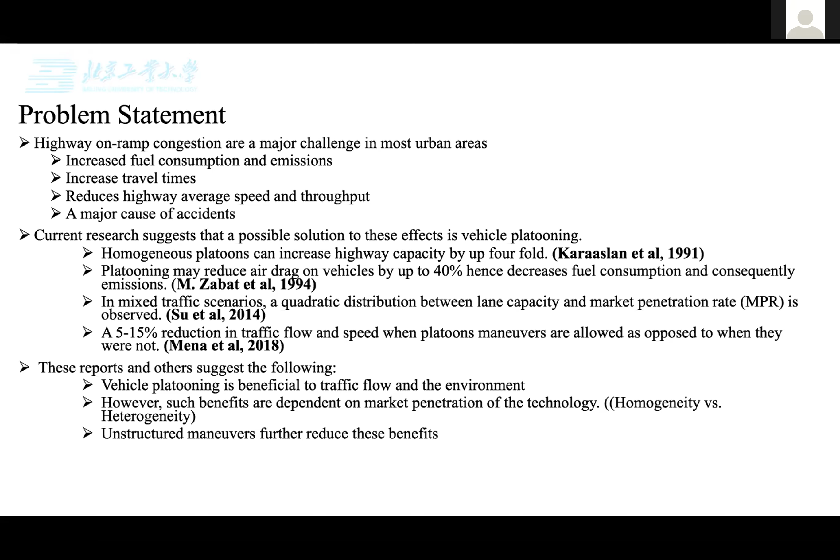Now, let's take a brief introduction to what platooning really is. Vehicle platooning is when two or more vehicles travel together at synchronized speeds by trying to maintain a constant gap between the vehicles. The advantages include improving traffic flow dynamics, travel speed and time, road and highway throughput. It also reduces the fuel consumption and emissions. It improves the safety because human error is taken out of the equation.

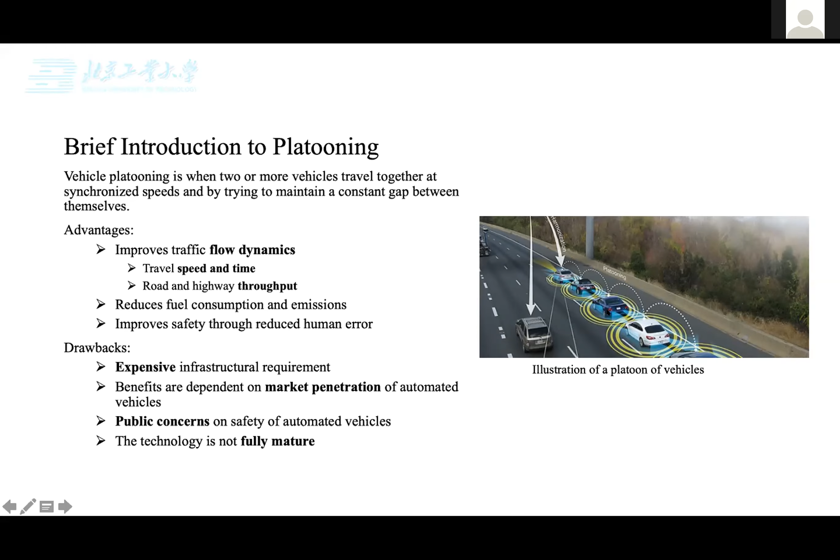Now, because it's not easy to achieve vehicle platooning in real life, you have to be part of a major project to actually execute a project like that on a large scale. We implement vehicle platooning on simulation software in order to observe the impact of such platooning applications on a network. The framework of choice we use is SUMO, which is an open source road traffic simulator. OMNeT++ is used for the simulation of communications between the vehicles.

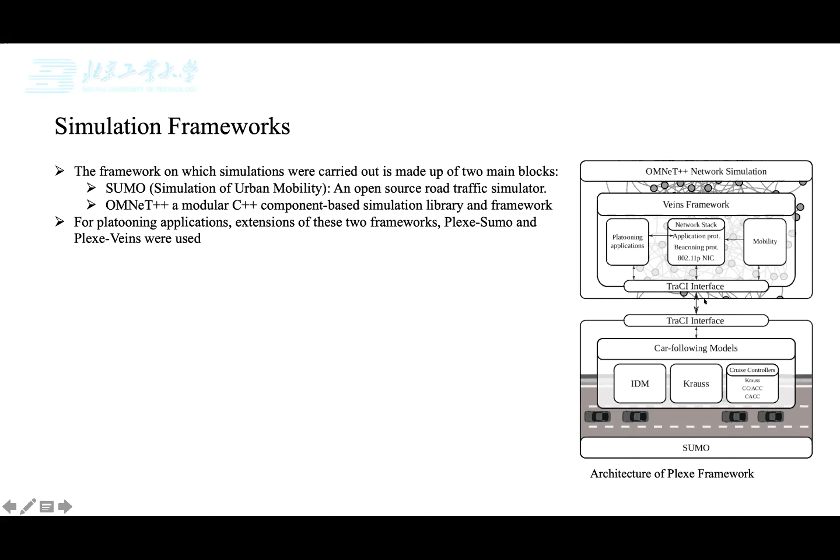And for platooning applications of these two frameworks, we use Plexe-Sumo and Plexe-Veins, as you can see in the diagram here. This aspect represents the Plexe-Sumo version where we simulate the movement of vehicles, and the OMNeT++ network simulation aspect gives us the opportunity to simulate the communications between vehicles.

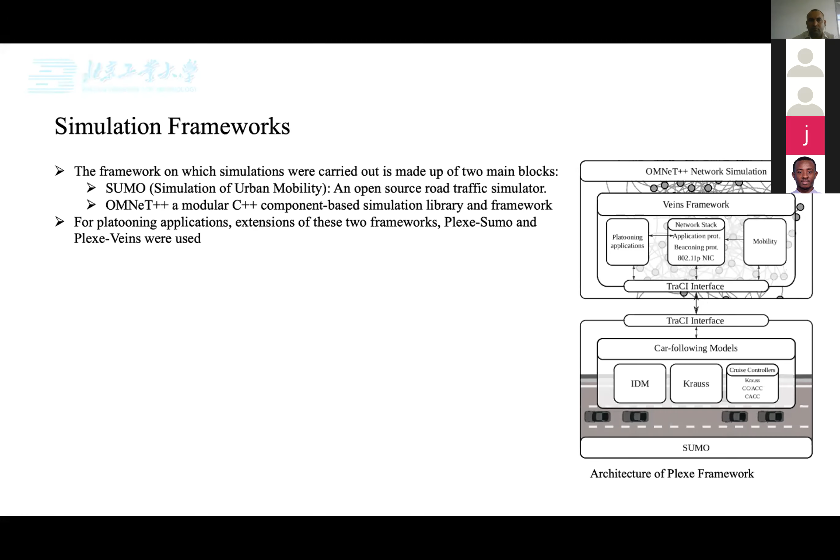Key among the functions of the plane model are: 1, the formation of lane and destination specific platoons; differential speed control, speed and spacing control; lane change, flag search, and cooperative lane change maneuvers. 2 safety protocols are also included in this model.

The first lane check estimates the arrival of platoons to conflict zones of both departing platoons and already existing platoons in the network, to ensure that when platoons are departed at a certain time within the simulation, they will travel from the source to the destination without any collisions. The second check ensures collision-free transit by comparing the trajectories of the departing platoons and the existing platoons in the network.

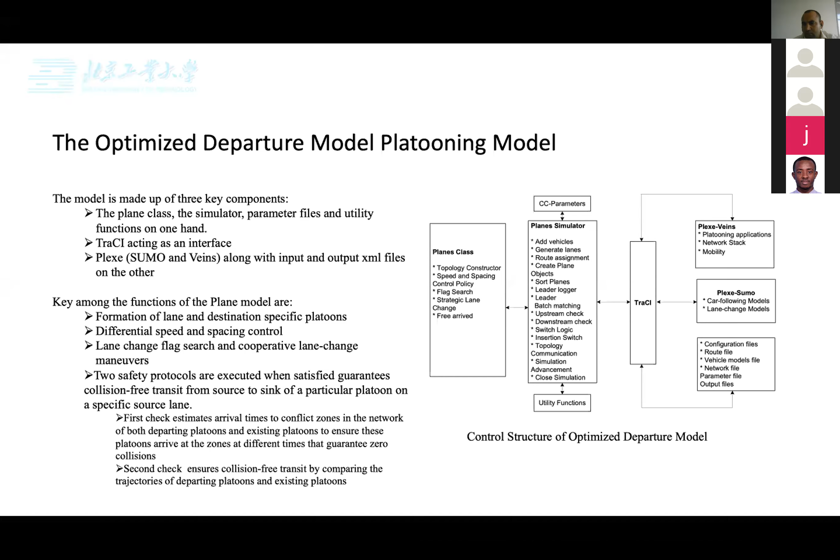The simulation setup, scenario setup. There are 3 scenarios that are studied in this particular study. The ACC scenario, which employs the Krauss car-following model for car following. The original plane model, which represents a previous study proposed by the authors of the study. And then the optimized departure plane model, which employs dual safety check protocol for lane-specific departures.

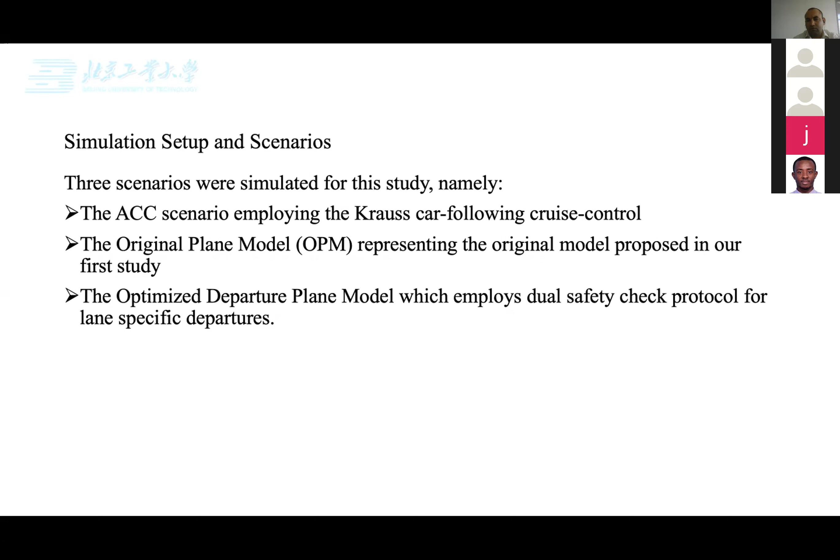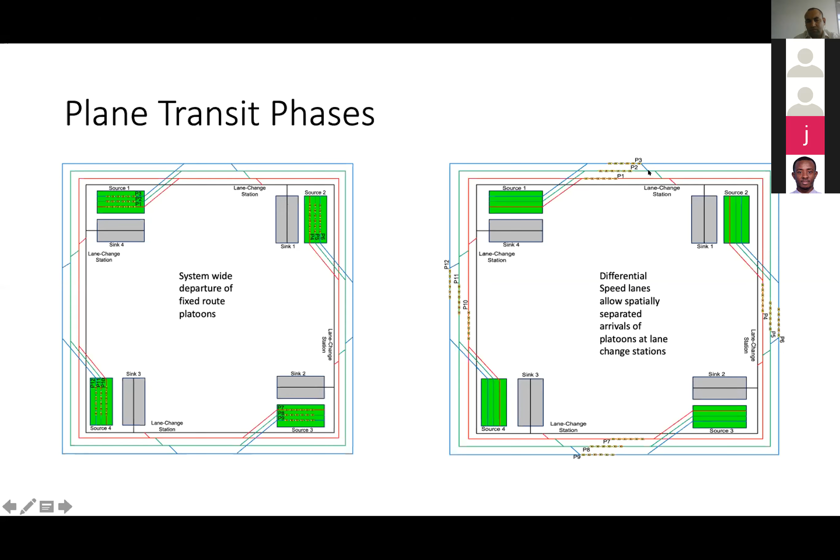So at this point, platoon 3 will step down to the second lane, while platoon 2 will step down to the first lane, and platoon 1 will step down to the last lane, which is the exit lane to exit the system. As can be seen, the first platoon arrives at its destination. The second platoon steps down onto the next lower speed lane and continues towards its destination, which is sink 2. And then platoon 3 also steps down from the highest lane velocity to the second highest and continues towards its destination, which is sink 3.

As can be seen in this figure, the farthest traveling platoon approaches its final lane destination station. And while all of this is happening, there is the dual check protocol, which is estimating the particular point in time where it will be ideal for a particular lane platoon to be departed. When we do this, we are able to control exactly when a platoon is departed. We are able to control the travel speed and the travel velocities of the complete network.

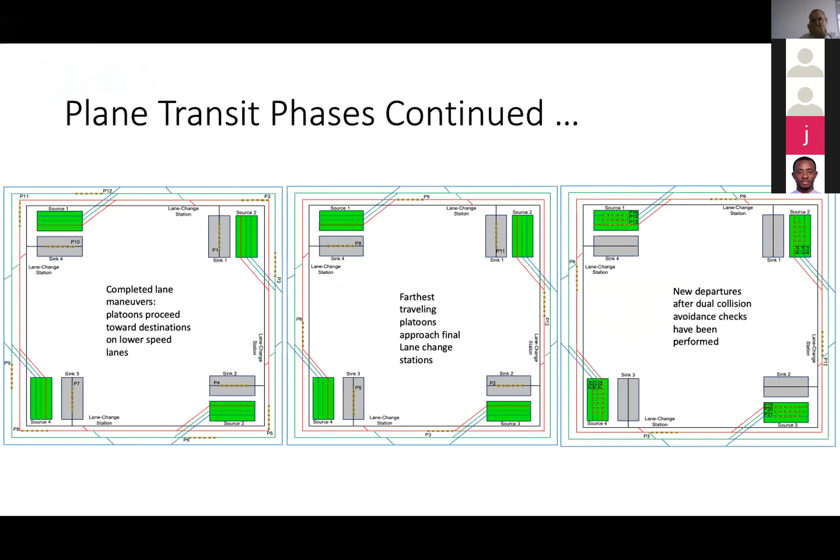Now to the results and analysis. Because of time constraints, I'll go straight to the point. With the ACC scenario, you will observe a lot of rampant and unstructured lane changes occurring. With the original plane model, you can see that we have limited the number of lane changes to 24 simultaneous lane changes at an instant. Between these lane changes, you would notice long periods of time where no lane changes were permitted. This allows for a smaller number of lane changes to occur during the transit.

For the optimized departure lane change model, you would notice that apart from the 24 simultaneous lane changes, there are spikes of more than 24, but multiples of 24 lane changes, because at any point in time when the system observes that it is an ideal time to depart a particular platoon on a particular lane, it is departed. So there may be more than 24 vehicles per platoon in the system at any given time. The total number of lane changes in that particular scenario is 4,008, compared to the 22,809 lane changes that are allowed in a normal setting.

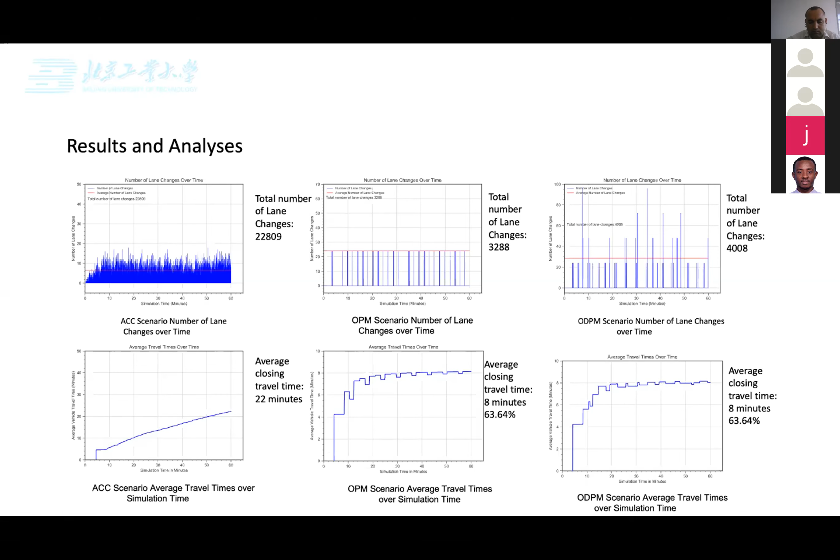Then we also observed the average travel time. By the closing of the simulation, which is 60 minutes in length, we observed that the average travel time from source to destination of a particular platoon was around 22 minutes, while in the original plane model and the optimized departure plane model it is around 8 minutes respectively. You can also observe that this is increasing with time, whereas we are able to stabilize the travel time around 8 minutes for both the original plane model and the optimized plane model. This is significant. It means that we will be able to predict just how much time a particular vehicle or platoon takes from source to destination, and we will not have to worry about congestion at all.

Again, with respect to average travel velocity, because of on-ramp and main trunk congestions, you would realize that at the beginning of the simulation, the average travel velocity increases all the way to around 45 meters per second and gradually goes down again to around 10 meters per second because of congestion.

However, when we compare that to the original plane model in our case and the optimized departure plane model in this particular study, you would realize that the average travel velocity stabilizes around 55 meters per second. This is significant as well, as it points towards around 243.75% improvement in travel velocity in the original plane model and the optimized departure plane models respectively.

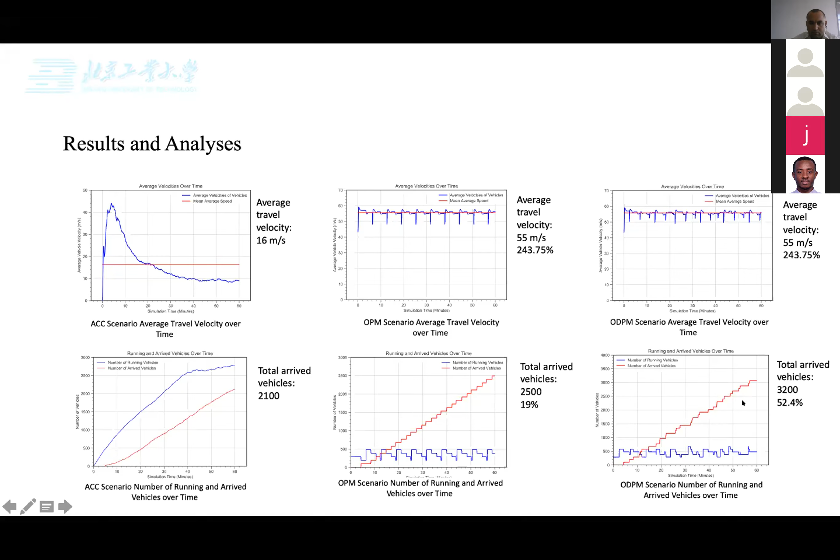With respect to throughput, we analyze the number of running vehicles and the number of arrived vehicles. For the ACC scenario, you would realize that the total number of vehicles that arrive at the end of the 60-minute simulation time is 2,100. For the original plane model, we have around 2,500 vehicles arriving by the end of the simulation. And with the optimized departure plane model, we have up to 3,200 vehicles arriving at the end of the simulation.

This signifies around 52.4% increase over the ACC scenario, which is in most cases a lot better than traditional traffic where humans drive the cars. Also, the original plane model maintains a 19% improvement over the ACC scenario. How are we able to do this? The blue line here indicates the number of running vehicles, and the number of arrived vehicles is the one in red.

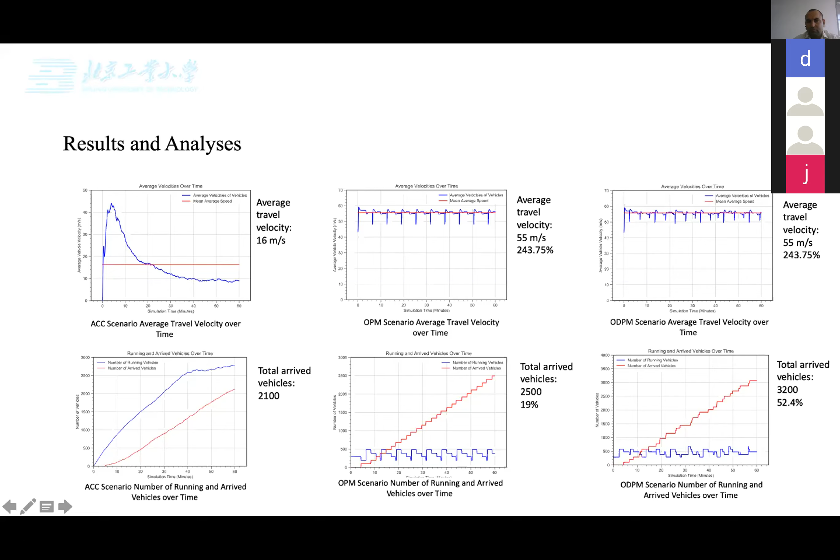Okay. What you observe in the ACC scenario is that the number of running vehicles increases simultaneously as the number of arrived vehicles. We're able to hold that down to around 500 vehicles in both scenarios here, while we allow the number of arrived vehicles to increase. This frees up the highway, and this allows us to have travel velocities as high as 55 meters per second.

We analyze the amount of fuel consumed as well, and as you see in the ACC scenario, the average fuel consumed during the simulation at any instant is around 3,200 milliliters per second. This number goes down to around 1,200 in the original plane model and 1,400 in the optimized departure plane model. Now, this does not mean that the optimized departure plane model is not as efficient as the original plane model.

What is actually happening here is that, because of the optimized departures, there are more vehicles that enter the system as time goes on. So you'd notice that the number of arrived vehicles in this particular scenario was more than that in the previous model. So this accounts for the increase in the average fuel consumed.

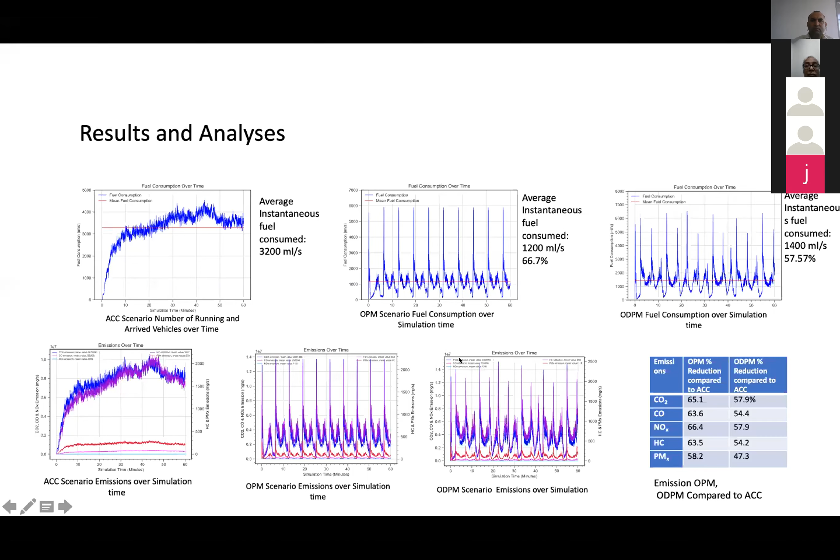You would also notice a similar pattern between the amount of fuel consumed and the emissions produced. This is because there's a direct correlation between the amount of fuel consumed and the emissions that are produced. So of course, we also make a lot of savings in emissions when comparing the original plane model and the optimized departure plane model to an ACC scenario.

This table gives the improvements of, for example, carbon dioxide in the original plane model versus the ACC scenario, and the optimized departure plane model versus the ACC scenario. These are good improvements over an ACC scenario, which is already a lot better than traditional traffic.

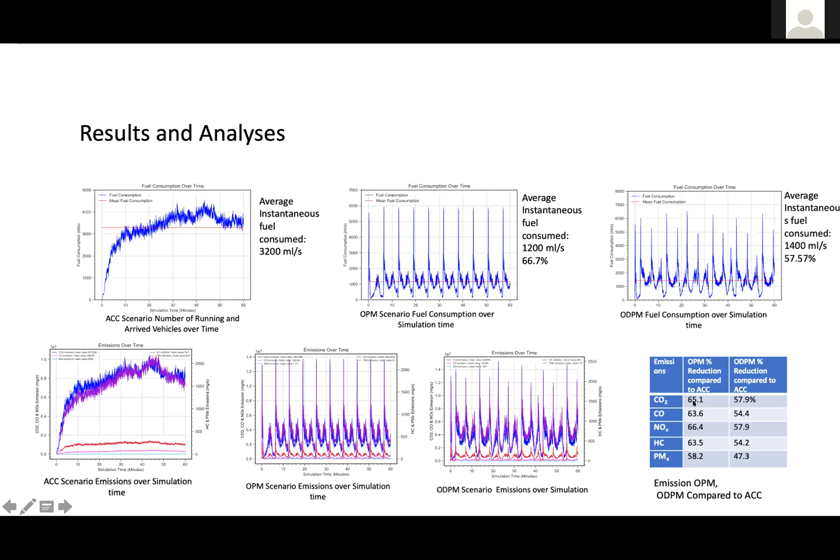In summary, this study has proposed an optimized departure strategy for the plane model proposed in our first study to improve the throughput of the model. A dual-check departure protocol for the platoons was proposed, and the protocol ensures the departure of platoons at the earliest possible time while guaranteeing collision-free transit from source to destination. The new model significantly improves on the previous model in throughput and is comparable in terms of all other metrics of evaluation.